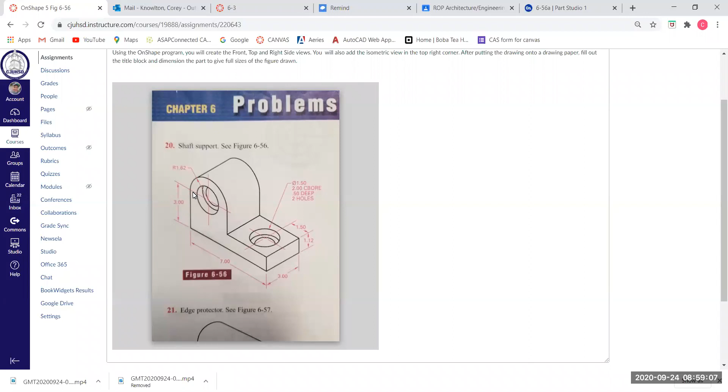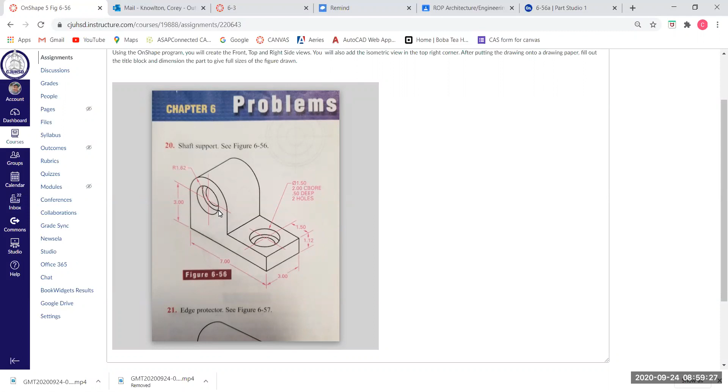0.625 is actually 5/8, so we're going to round this up to 1.625, and that means coming across this way 1.625 times 2. Let's see what that is. That's 3.25. So this piece right here, I just took 1.62 times 2 to get this measurement, and then 3 plus 1.62 to get the height.

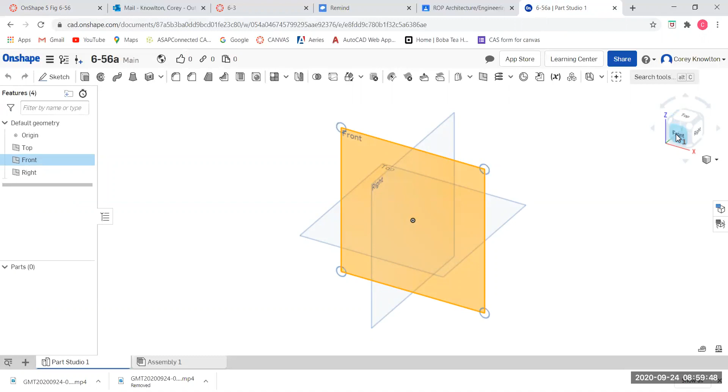All right, so let's go to our canvas. I'm going to work on the front view, so I'm going to turn that square. I'm going to create a sketch, sketch of a rectangle.

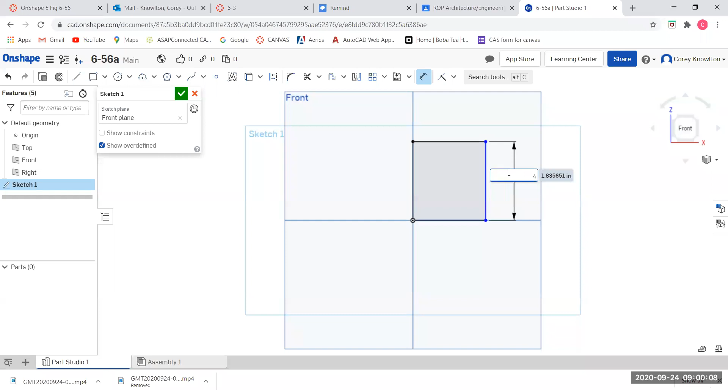And the height, I said, is going to be - hold on - so 3 plus 1.62, so that's 4.62. And the width is 3.25.

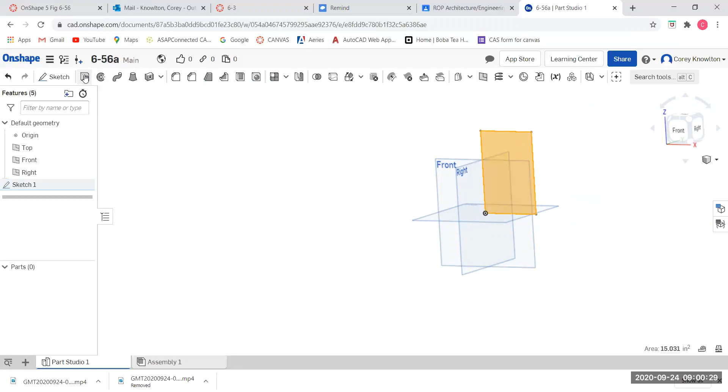Check mark. Turn it sideways. Highlight it. Go extrude, and it is a 3-inch wide extrusion.

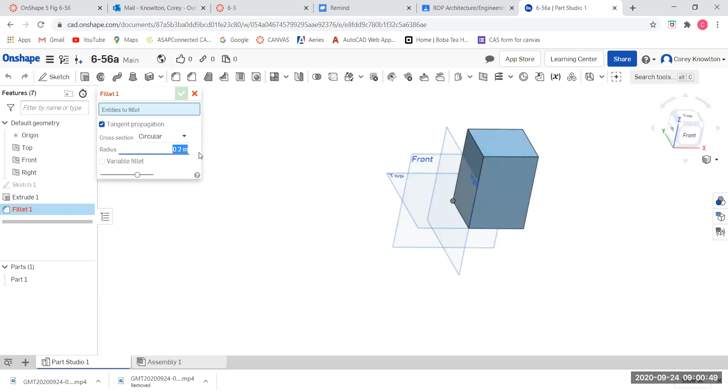Good. Now I'm going to round over the corners. Remember I said the top of this needs its corners rounded over, so I'm just going to use the fillet command right here. Fillet. Set the fillet radius at 1.62. And click on that, and click on that. Pretty easy, easy peasy.

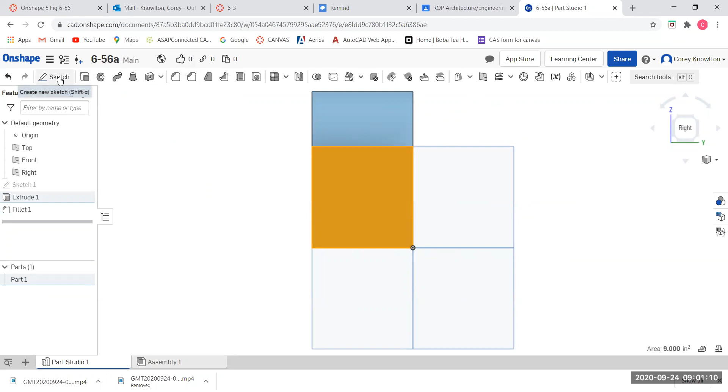I'm going to slide over to this face right here, which is the right side, and I'm going to create a rectangle, so sketch. And the height of this side is 1.12. So to dimension, 1.12.

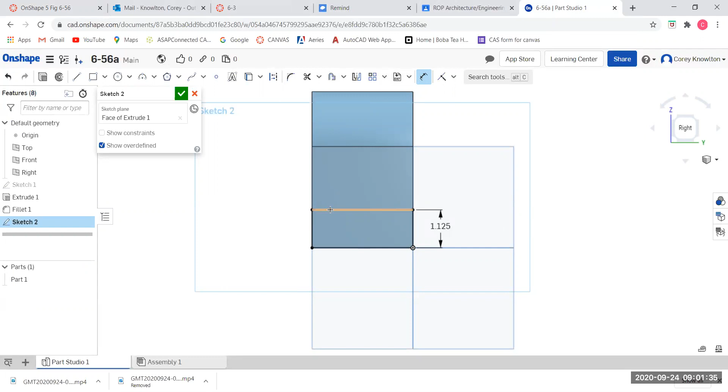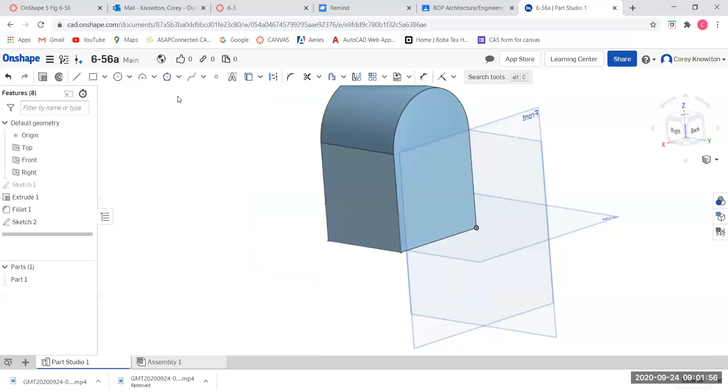All right, and I'm going to turn this sideways. Let's see, and the whole thing is 7 inches long. This is 3.25, so this has got to be 3.75. So done with that. Highlight the rectangle, extrude - we're going to add, and it's going to be 3.75 for the length of the extrusion. Okay, so far so good.

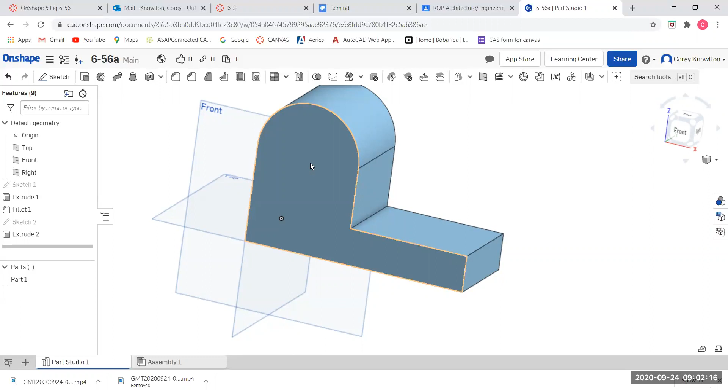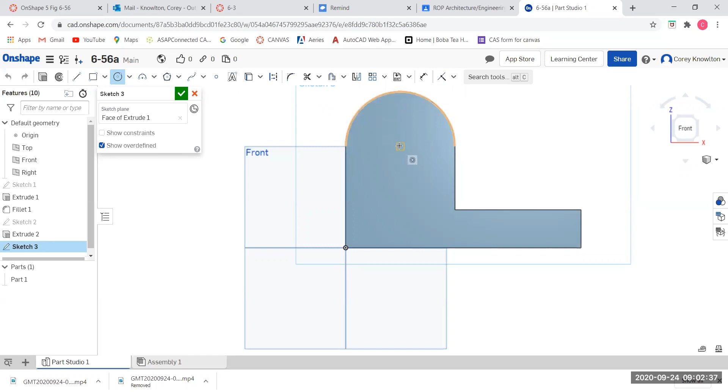Now we're going to cut the 2 circular holes on this face here. So I'm just going to go to the front view, and we're going to do a sketch of the circle. We need to make sure that the circle is at the same center point, so make sure you put your mouse on the outside of the circle for a second, and then go to the center of the circle, and it should give you the center point. That way we know they're concentric, right?

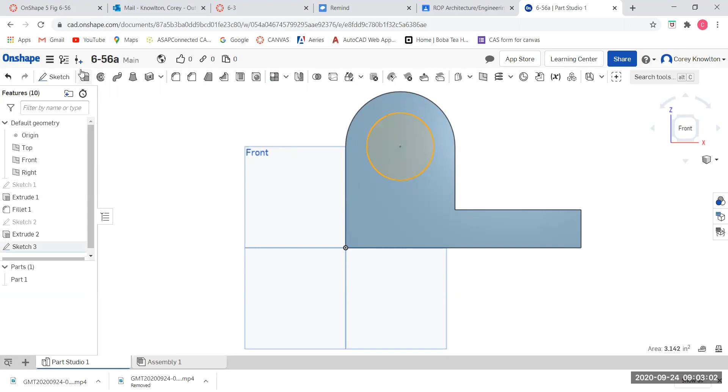And this is a diameter of 2, so I'm going to go dimension this, and it is a 2-inch diameter. Exit. Highlight. Extrude - this time we're going to remove, and it's going to go in a 1/2 inch, so 0.5.

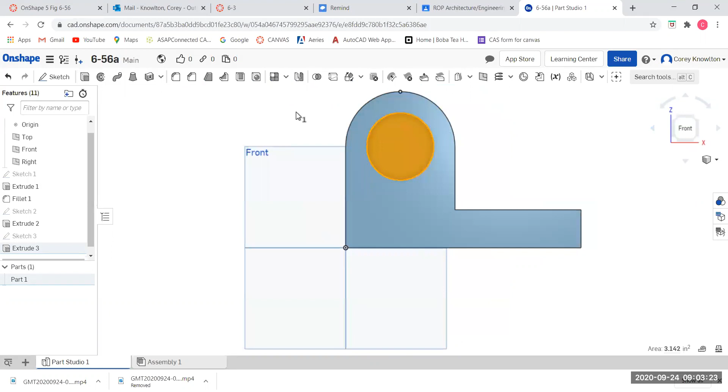Done. And we're next going to work on this inside surface. So click on that inside surface, go back to the front, do another sketch with a circle. Hang out here for a second, go to the center. And this is a 1.5 diameter, so dimension.

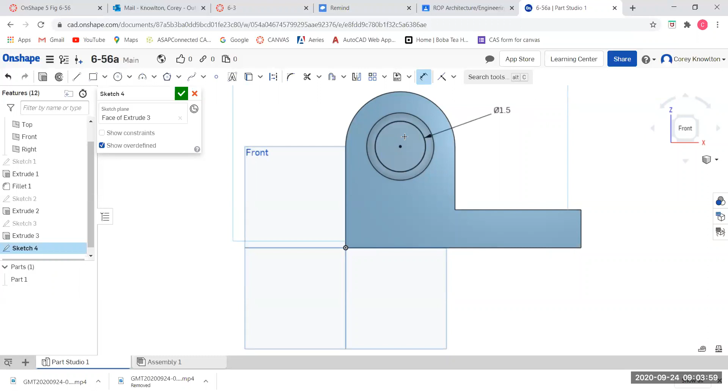1.5 diameter. Be done with the sketch, highlight the 1.5, and it's going to be extruded, remove. Instead of blind, we're going to go through all.

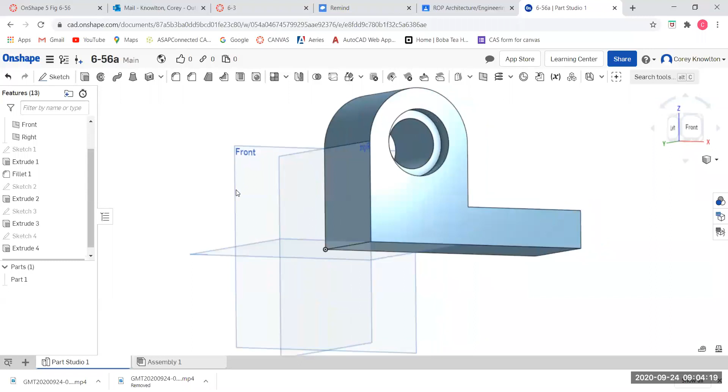Right, so there's the top part. Next, we're going to work on this top surface, and I'm going to do the same thing. We're going to create a sketch of a circle somewhere right over here. Dimension, it's a 2-inch diameter.

Now we have to locate this one. This one here was just at the center of this circle, but this one we actually have to locate. So let's look at where it's located. It shows from this edge to the center is 1.5. And then it doesn't give us one this way, so it must be centered. So it's going to be 1.5 from both of these corners, because 3 is the total, so 1.5 in both directions.

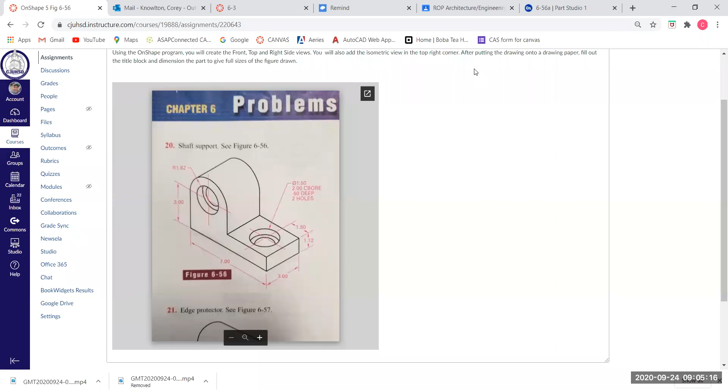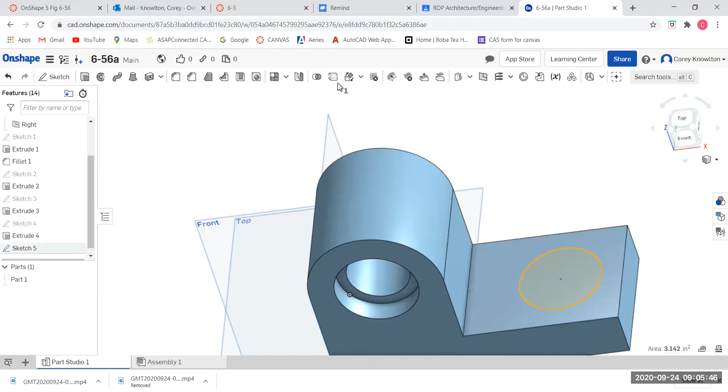So when I dimension this from the top to the center, this has got to be 1.5. And from the side to the center, this one's got to be 1.5. So now it's in the exact location that it needs to be. We're done with the sketch. Highlight the circle. Extrude, we're going to remove, and it's going to be 0.6 for our depth. And done.

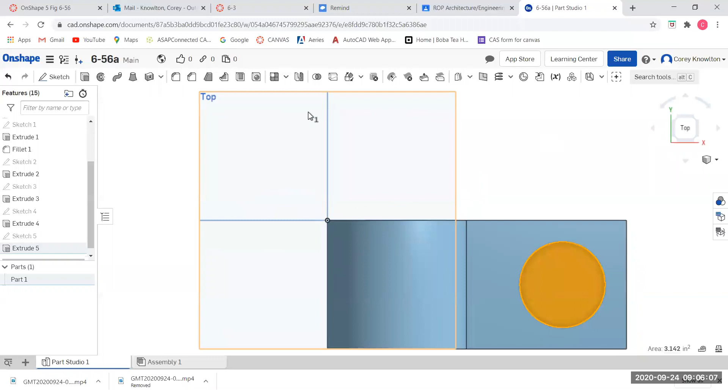And then the last thing, highlight the bottom surface here. Let's go to the top. I'm going to create a sketch of another circle. Hang out on the edge for a second, go to the center. Dimension. This is 1.5 for the diameter.

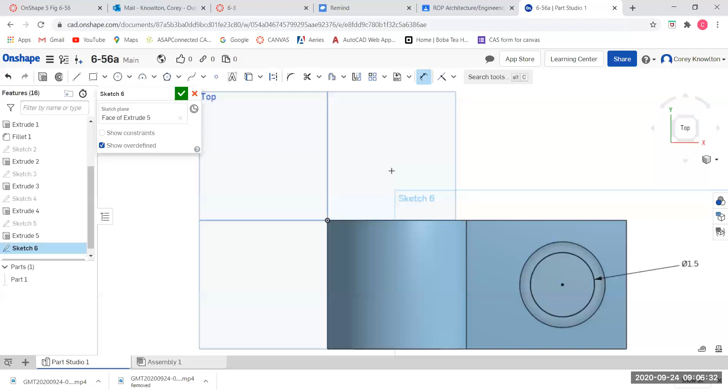Check mark. Highlight this inner part of the sketch. We're going to remove, and instead of blind, we're going to do through all.

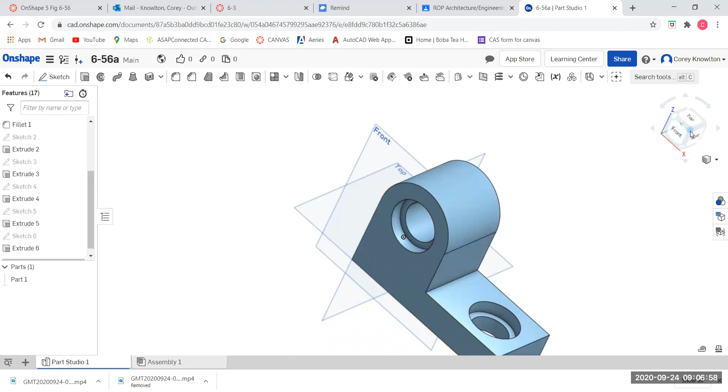Okay, so now we're going to move this and put it on a paper. Create a drawing.

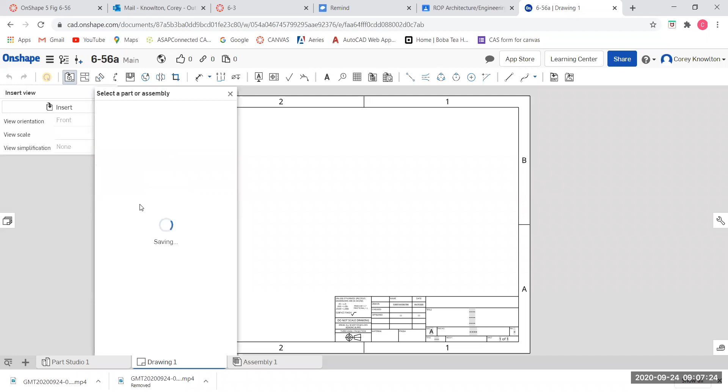And we're going to select this one. Front view. Place it here. Straight above, place it here.

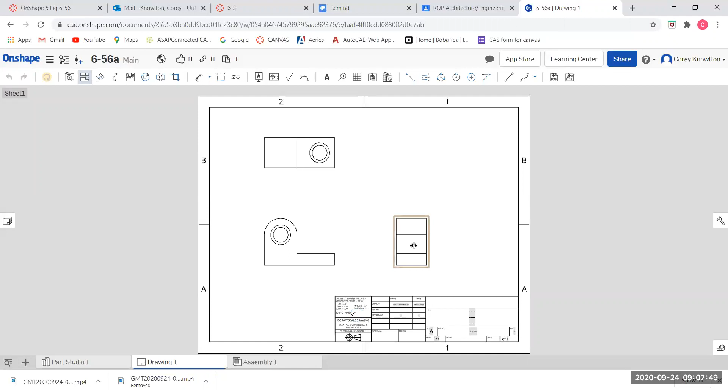Uh-oh, my computer's lagging. Click on the front view again, come over here. Place the right side view. Come back, click on the front view. Go up at an angle.

Drop off the pictorial view, then hit escape to break out of that. Right mouse click on each of the views, show hidden lines. Right mouse click, show hidden lines. Right mouse click, show hidden lines.

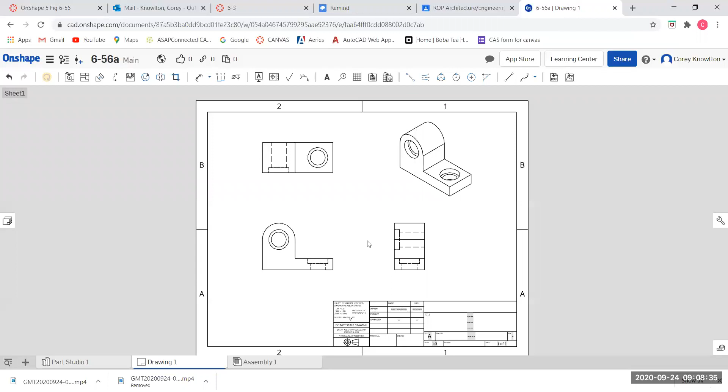Now we have to go through and add in the center lines. So to add center lines for the hidden feature, we click on this button right here. You click on the outer edges. Outer edges. Outer edges.

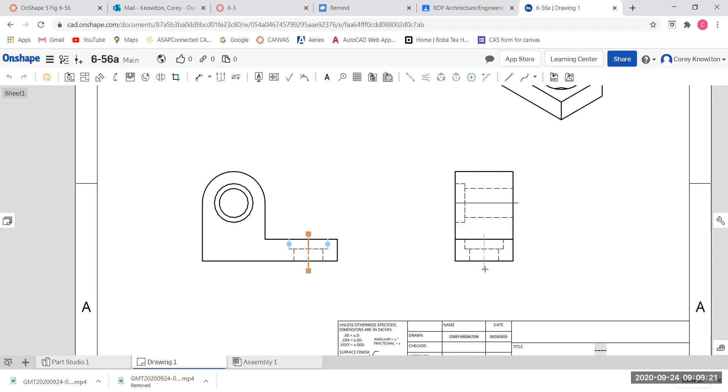Okay, I hit escape, and I'm going to take that line and I need to extend it, because it needs to stick past the edge of the drawing on both sides. So make sure that you extend those center lines so they stick past the edge of the drawing. This one too, this one has a line that's in the same location. It's going to end up looking like that.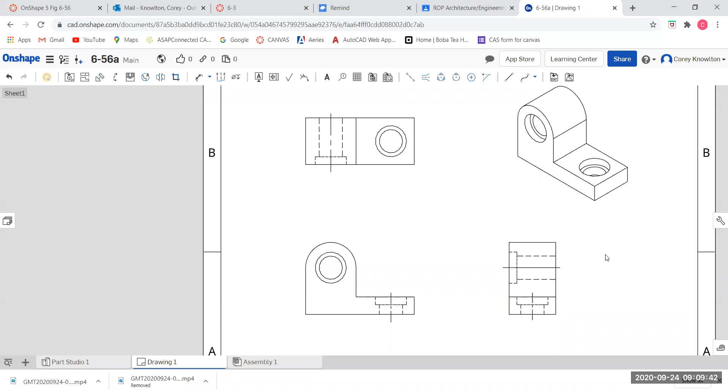Now we need center lines for these. And remember, you've got 3 circles here, 1, 2, and this outside one, so we have to include this in the center line. So let's go 2-point center line. I'm going to click on the outside edge of the big circle, the outside edge, like that.

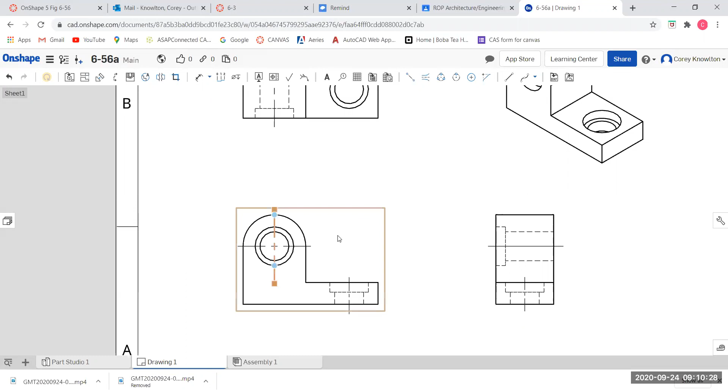And I'm going to need to extend this one down. Okay, same thing over here. 2-point center line, always do the biggest circle, this way and this way. So center lines here, yep. Center lines here, yep. Center lines here, yep.

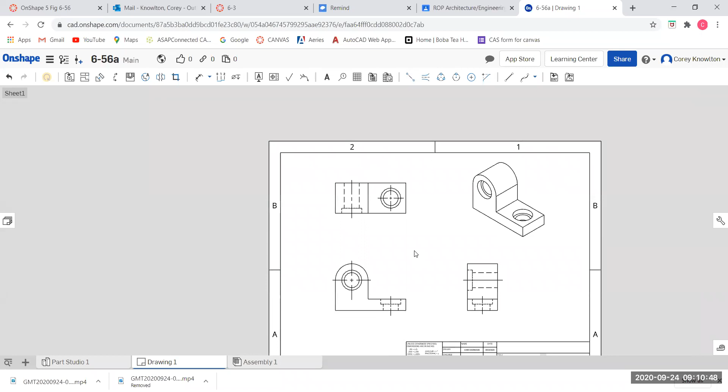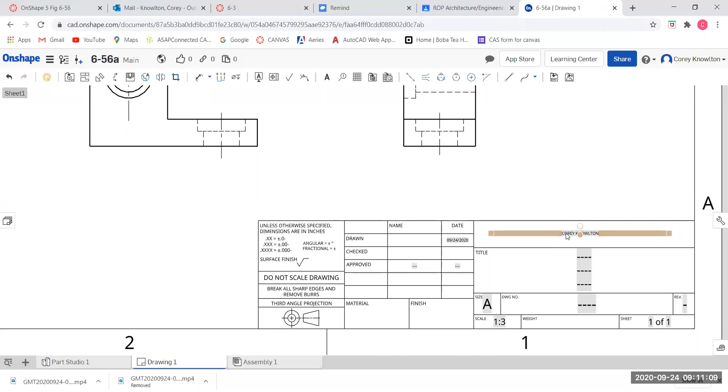I do not need to include the center lines for the isometric view, but you do have to fill out the title block completely. I like to take your name and put it in the middle and make it bigger. Double click on it, highlight your name, and make the font size larger.

And then this is drawing... what is this one called? This is 6-56, I think. Here's 6-56. Check mark.

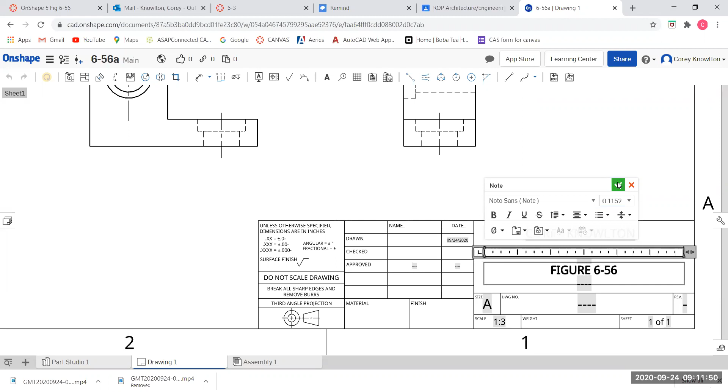And get rid of these things, these things. There we go, looks all good. And that is the completion.